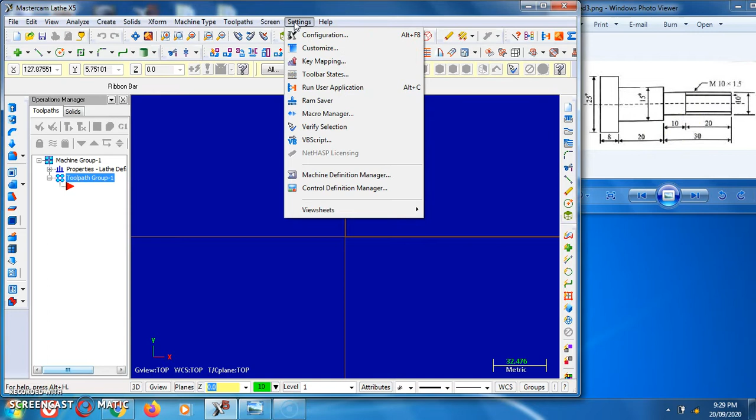So go for the settings, configuration, changing the dimensions to millimeters, confirm that the dimensions should be in metric. Okay, so let's do the modeling in the first quadrant. Select the top plane. Okay, so prepare the figure in the first quadrant by considering this as the 0 point.

Select the line, mark the 1 point, and here we have to just prepare the half portion of the figure, that is the top portion. So the complete length of this product is 30 plus 20, that is 50, plus 8, that is 58. So first of all I prepare one line of 58, and the angle we have to follow is 180 degrees. Press enter, click OK. So now this is the complete length of the given product.

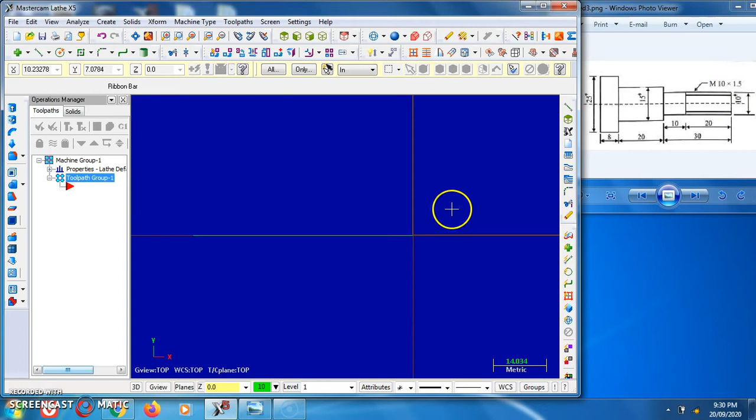Now we just have to prepare the half portion at the top side. So the initial portion has a diameter of 10 mm, so make one line vertically upward, that is 5 mm. So click 5, angle 90 degrees for the vertical line. Now the step of 20 plus 10, that is a complete 30 mm. So prepare another line of 30 mm, in the direction of 180 degree angle.

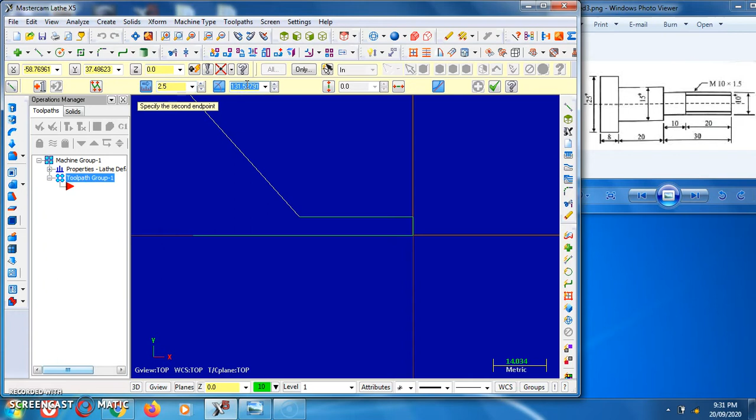Press enter. Now another line that we have to prepare is 7.5 mm from the given line. So initially we already prepared the line of 5 mm. So from this line we have to make a line of 2.5 mm, 2.5 mm at a 90 degree angle. Click OK. Now make the step of 20 mm. So horizontal line 20 mm at 180 degree angle. Press enter. And finally the step of 8 mm.

So the distance is 12.5. We have to prepare it from the center line. So we already drew the 7.5. The remaining distance we have to prepare here, that is 25 divided by 2, right? So 12.5. We already drew the 7.5, so again we have to prepare a line of 5 mm. So 5 mm at 90 degree angle. Okay. Now we just have to complete this line, the 12.5 line, with respect to 90 degree angle, and just join this line.

Now this is our half portion of the product that we have to manufacture, and for the step of 20 mm we have to go for the threading operation. So step turning plus threading, these are the combination for the given figure. Now first we have to select the machine type. So here the lathe machine is already selected by default.

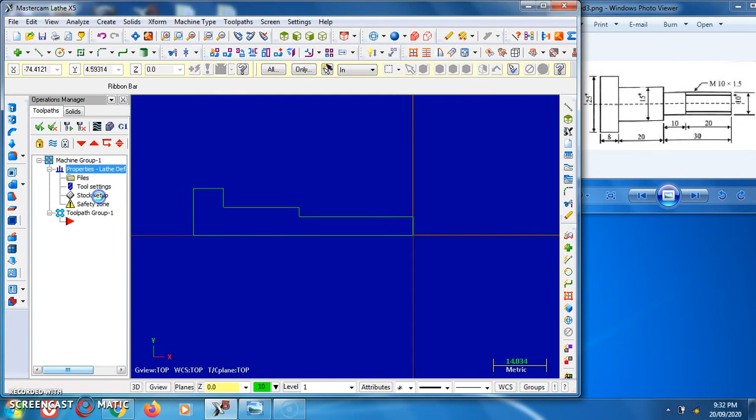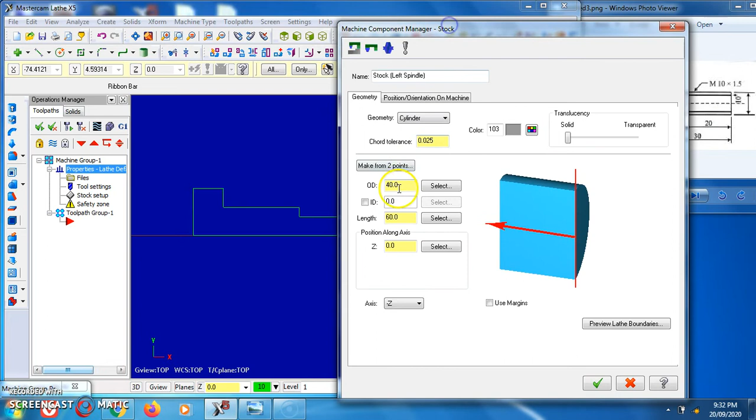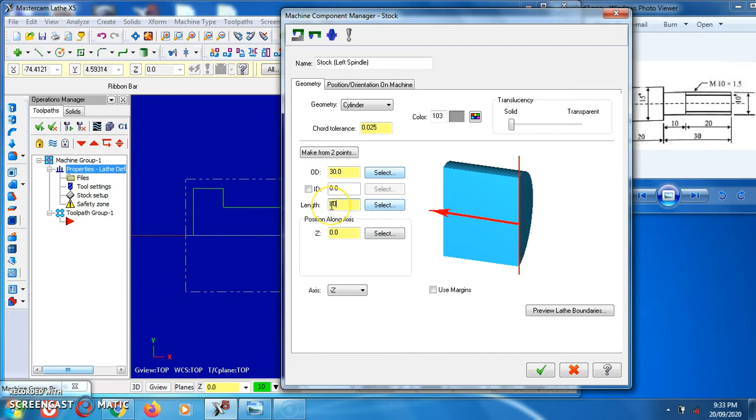So double click on the properties, go for the stock setup. The current diameter of our product is 25, but we set the stock more than 25 because we have to prepare the step turning. So go for the stock, click on the properties and select a stock of minimum 30 mm. The length of the given product is around 60 mm. So here I select 80 mm as the length, because we have to hold some portion of the component in a chuck. That's why we have to maintain a minimum 20 mm distance.

Click OK. So now this dotted line is showing the stock portion. Now select the type of chuck. So here we use the left side spindle. Go for the properties, and the grip length we have to select here is 10 mm, and just click OK.

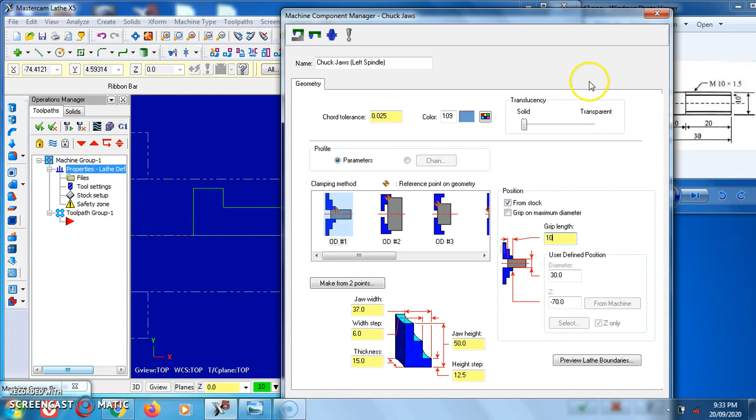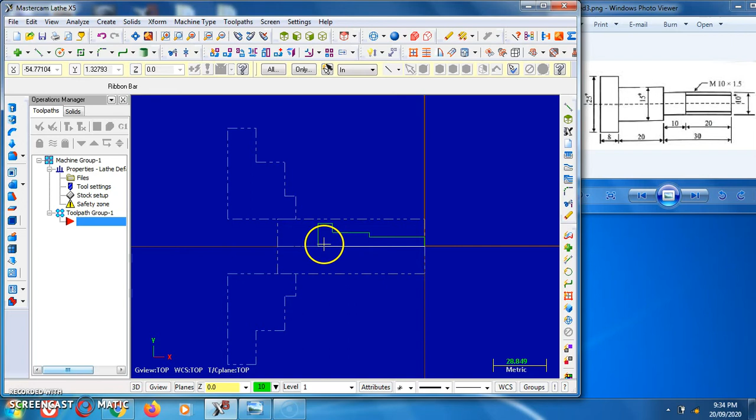Okay. Now see, this is the position of the chuck. This dotted line shows the stock material, and this green line shows the final product. So up to 10 mm length, the component is held inside the chuck, so the chuck is holding the given stock material. So now we perform the first operation. Go for the toolpath, that is the roughing operation. Click on rough, click OK, select the chain, select the first line and the last line, click OK.

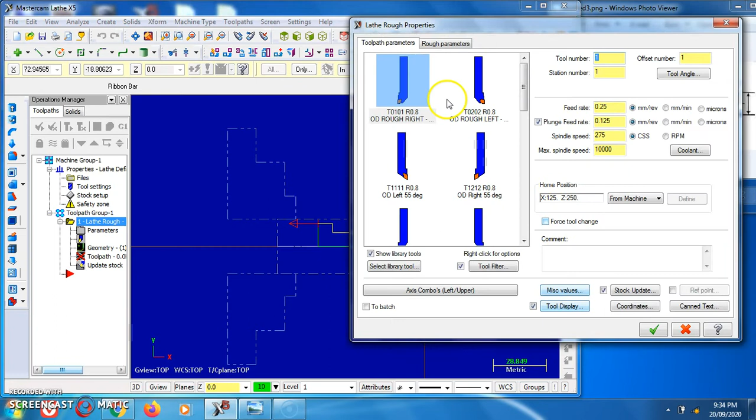Now we select the rightward tool, the roughing tool. Now here we can change the spindle speed, feed rate, maximum spindle speed as per our requirement. Click OK. Now we have to verify this operation. So click onto the verify selected operation, click it and just run it.

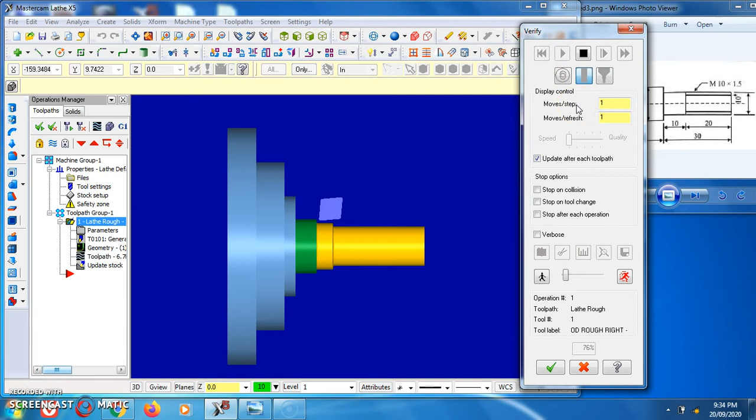So now the tool is showing the step turning operation. So this is the roughing operation. After roughing operation, just click OK. Now we have to suppress this operation. Just click onto the toggle display.

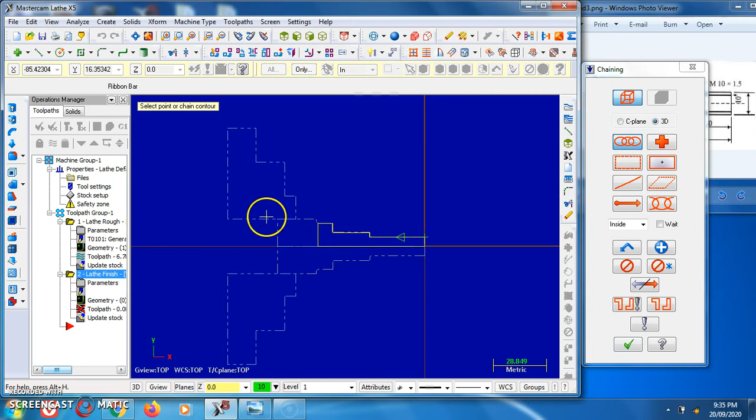Go to another operation called the finish operation. So it's a finish cut. Select the chain, first line and the last line. Click OK. Now here we have to select the finish tool. This is the rightward finish tool. You can change the parameters.

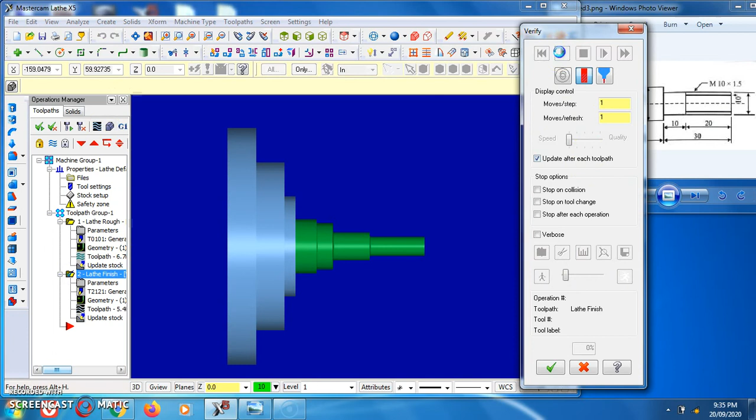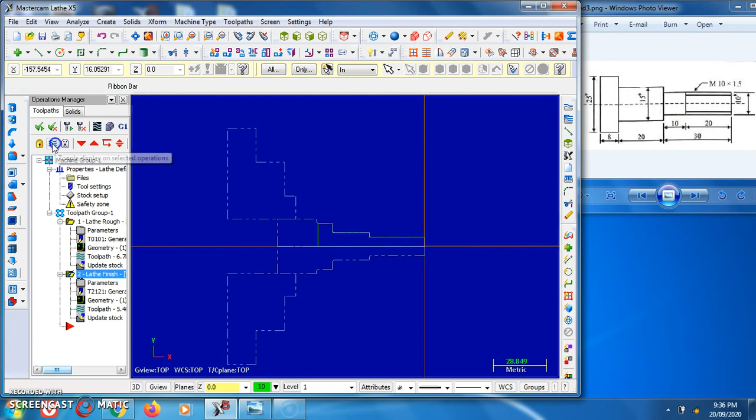OK. Now verify the operation. Select the operation and click onto the verify. Just run the operation. So now this is the second operation, called the finishing cut operation. Now, before going for the next operation, go for the toggle display, then tool path and threading operation. So click onto the thread.

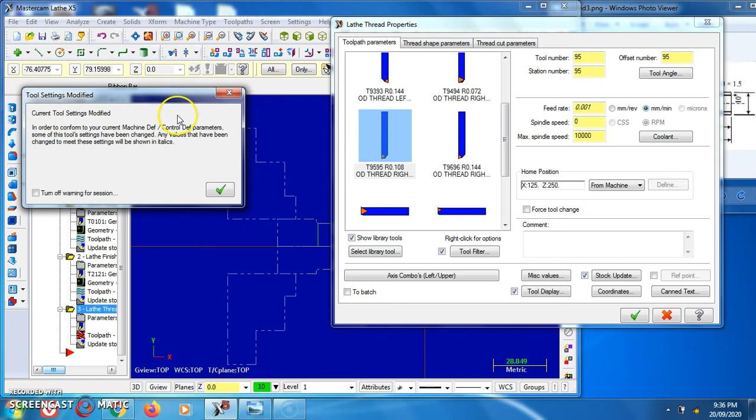Now here in the threading operation we have to select the tool. Obviously this type of tool we have to select, or we can modify the tool, or we can select the tool from the library. This is the tool library. So left-handed and right-handed tools are available here. We have to select the right-handed tool.

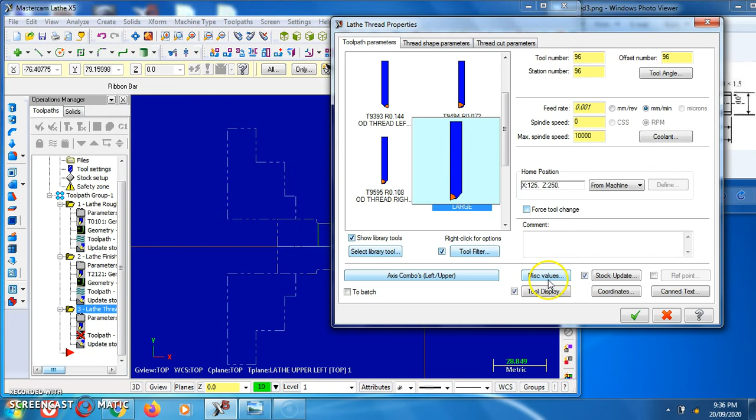Now we have to change the thread parameters. So as per figure, we have to prepare the thread of 1.5 mm. So here we have to specify the major diameter and minor diameter. Here the major diameter is 10 and 1.5 mm is cut from both sides, so the minor diameter is 7. Major diameter 10, minor diameter 7. So automatically the tool depth is 1.5 mm. That is the required thread depth.

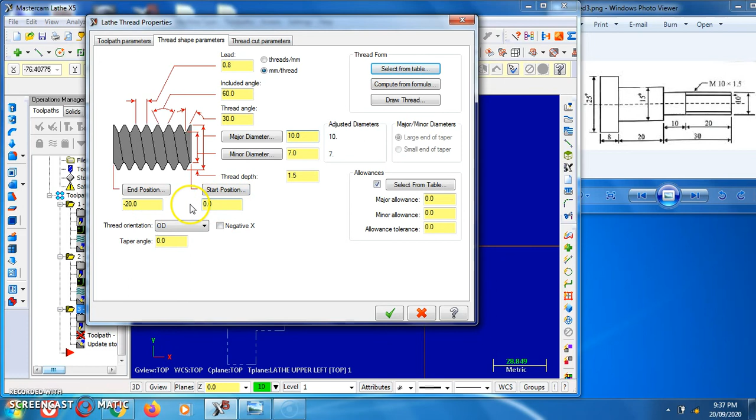Now the starting position and end position we have to define. Starting position obviously we keep from 0, and up to 20 mm we require the depth. So minus 20 is the end point, and the starting point is 0. Click OK. Now we can verify the operation. Just click onto the verify selected operation. I just zoom it.

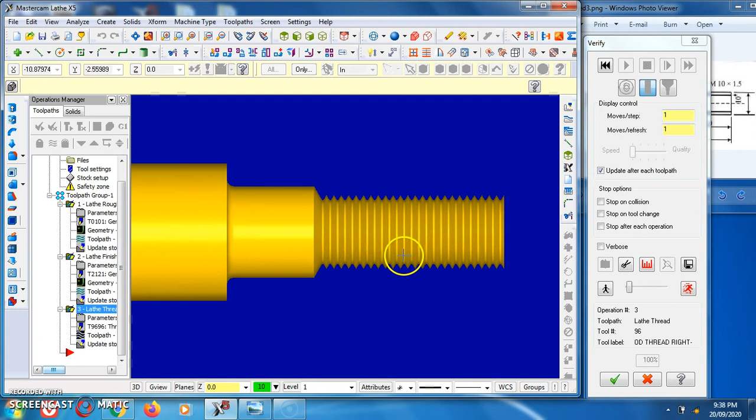Go for the run. So it's showing all these operations. First roughing operation, then finish operation, and this is the threading operation. So now we are getting the proper threading as per our requirement. We can change the position of the view.

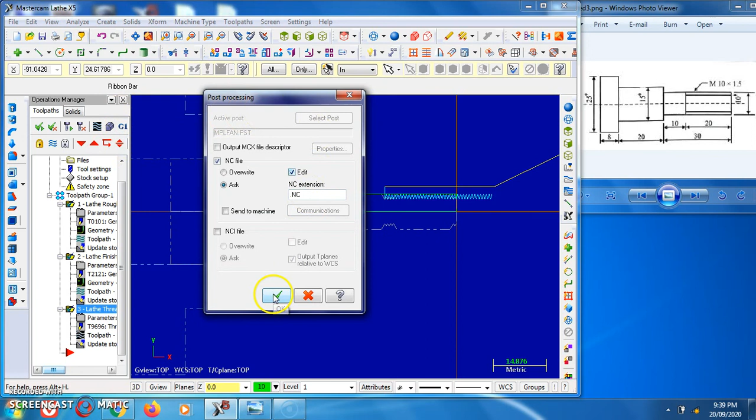So it's showing in a top plane. So 1.5 mm depth we are obtaining here. So it is called the threading operation. Now click onto OK and go to the shaded display. This is the wireframe. So we can generate the part program, the .nc file. Okay, yes, I want to replace the existing file.

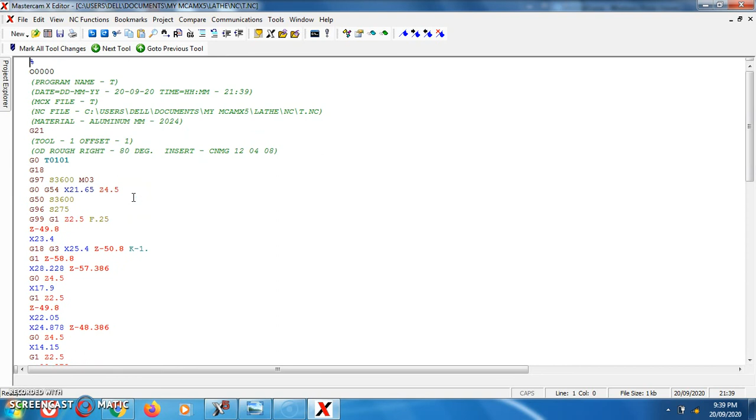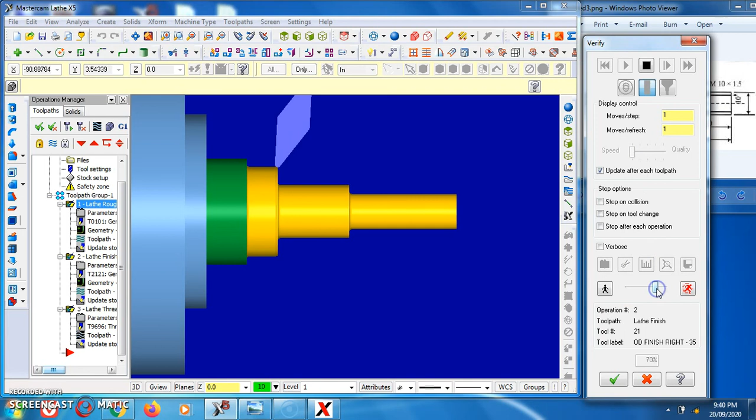Now for all these three operations we are getting the part program. So this is the CNC part program that we generate automatically with the help of software. So these are the three operations that we can perform with the help of Mastercam software. Verify the selected operation; once again you can verify all these operations. We can change the speed. So this is the particular threading operation.